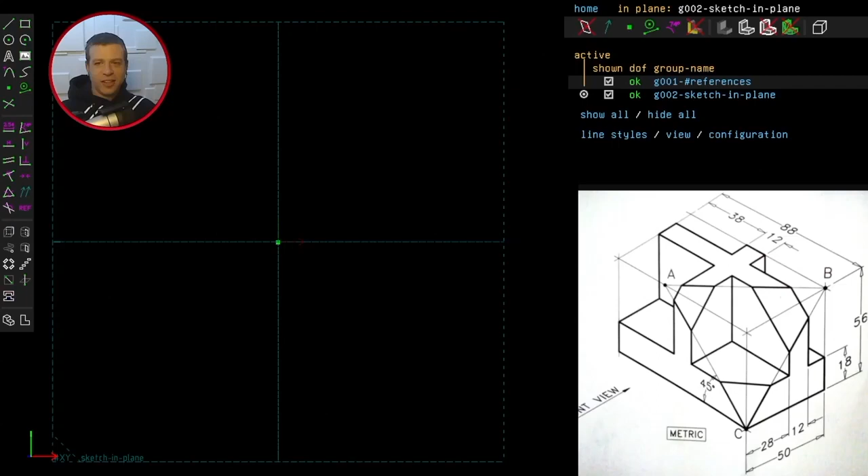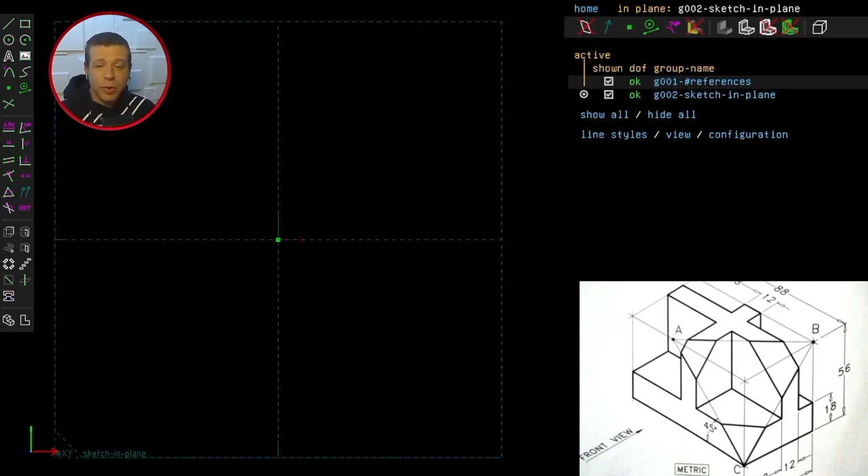Welcome to challenge 3. Let's take a look at the technical drawing. It looks pretty straightforward, but there's one part that looks quite challenging, and that's the slanted cut that goes through the side that faces us. We'll use some things we learned in the previous 2 challenges to help create that slanted cut. So let's head into SolveSpace.

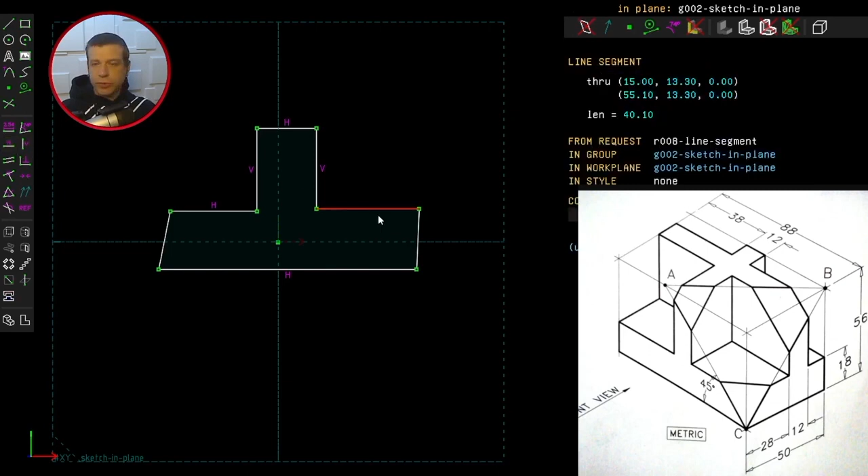It doesn't have to be perfect because we're going to constrain these in a moment. I'm going to make these lines horizontal and vertical now, so this one has to be horizontal. As a reminder, this line looks horizontal, but it isn't. You need to click on horizontal or vertical until you get the letter next to the line, and that is now definitely horizontal.

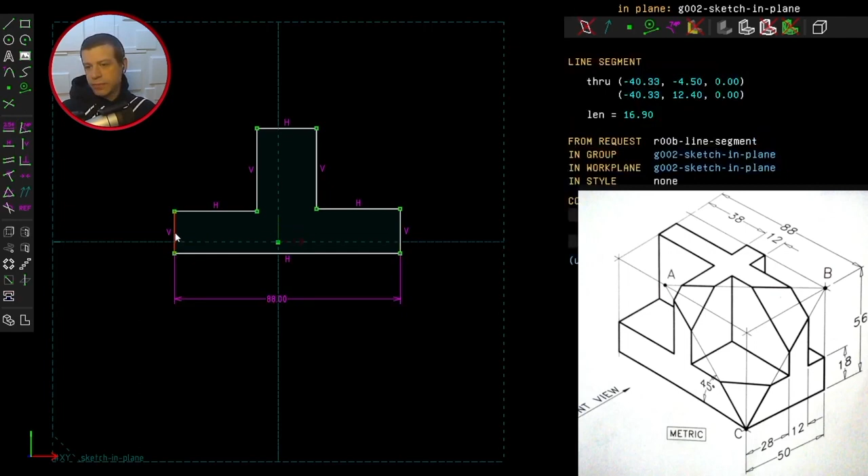Now we've got 8 degrees of freedom, and that's because we need to tell SolveSpace the length of these lines. This line is 88 millimeters, and this line is 18 millimeters.

You can see that we've got 6 degrees of freedom, so these lines need to be sorted out now. Well, we know that these have to be equal in length, so we select the lines and then select the Constrain Equal Length button. Now they're exactly the same length.

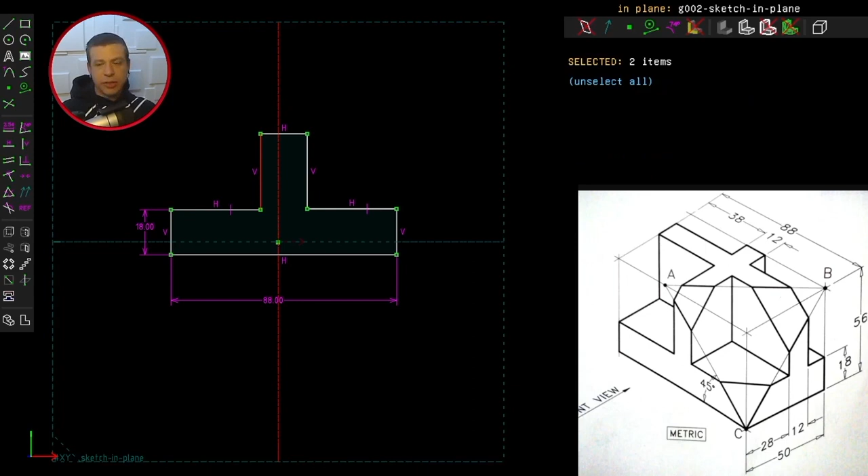This line here is 38 millimeters - you subtract 18 from 56 to get that. And you can see these 2 points are not horizontal, so I need to say that these 2 lines need to be the same length, and that is 12.

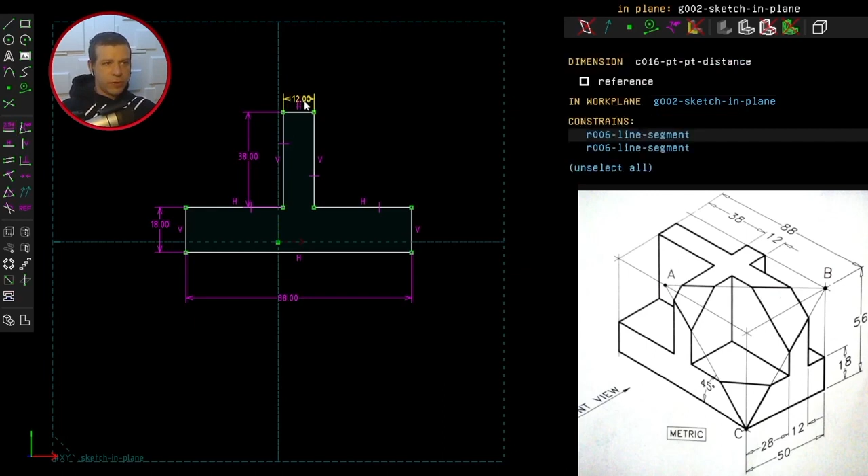The only thing left is 2 degrees of freedom because I can move the whole thing around. I need to anchor it. I'm going to select this point and that point and click Constrain Point on Point. And now we can extrude it.

By 50 millimeters. Okay, so the next thing I need to work on is this rectangular shape that's been extruded at the top here. So I need to create a new work plane.

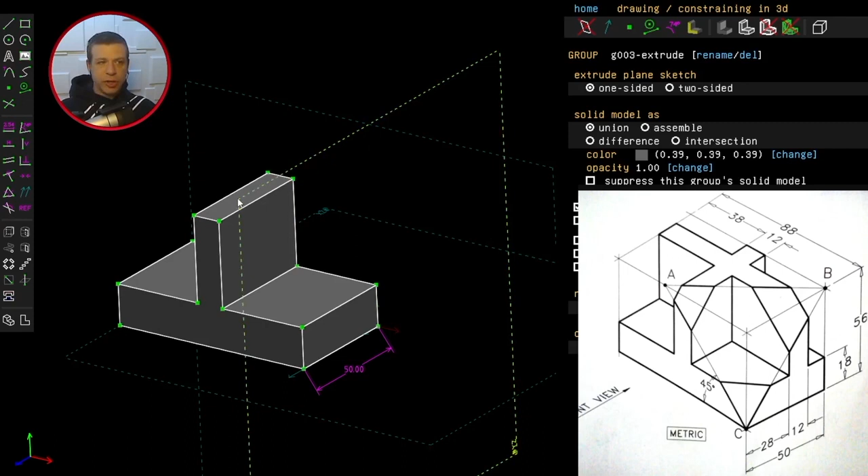Select this button here, and now we're going to be working at the top of this part of the object. So whatever we put here now will be flush with this surface. I need a rectangle.

Let's constrain that. So this point and that line have to be overlaid over each other. I'm going to constrain the point onto the line, and same thing on this side.

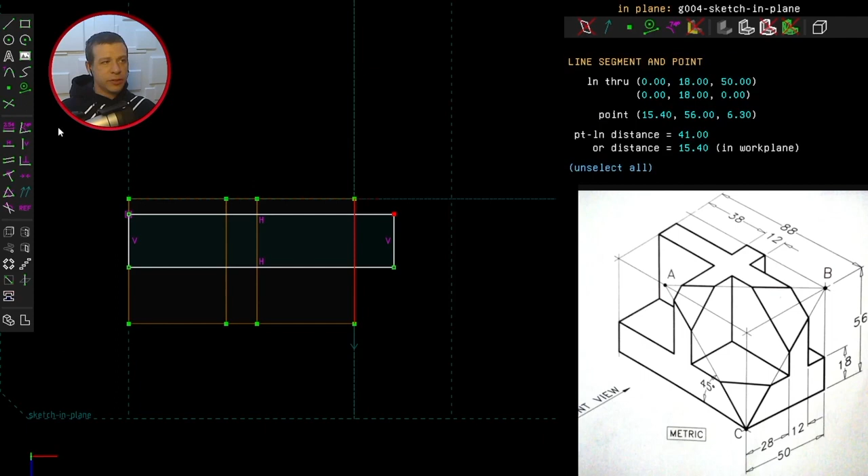Now that's constrained the length of the rectangle. Let's specify the width, and that needs to be 12 again. We've got 1 degree of freedom left, and that's because I can slide this.

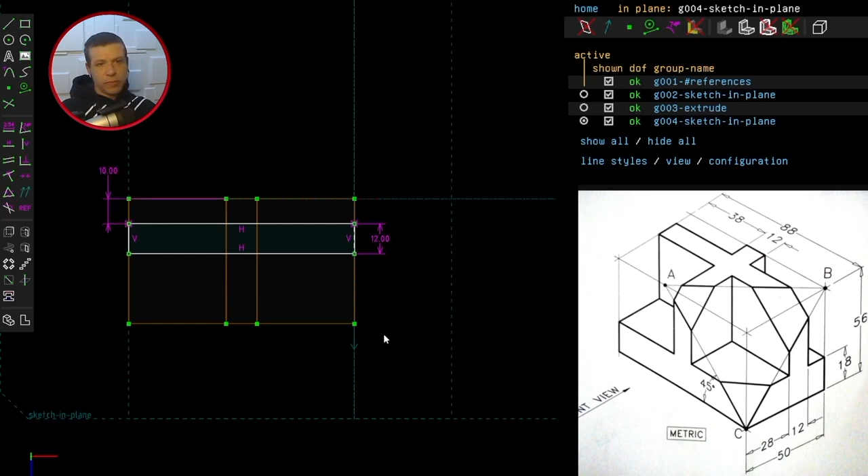So I need to specify the distance from this point to this line: 10 millimeters. Now we've got 0 degrees of freedom, so we can extrude this.

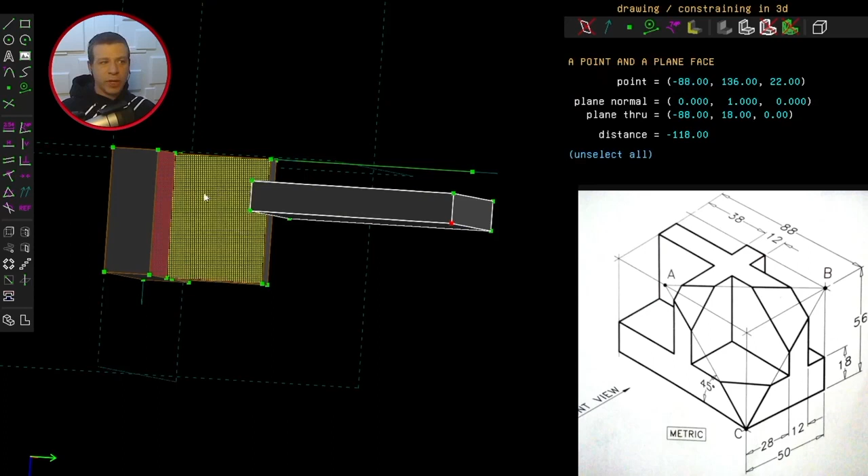You can see it goes outside, but I want to say it's a union - I don't want to take the difference. It is a union this time, but I want this point to be flush with this surface. So I've selected that point and the surface, and now we need to click this constrain point onto surface. Now we've got a unified structure.

So far that looks good. If we look at the diagram closely, we see that we already have point C given to us, but we need to place A and B in the model. A and B are in the same plane at the top of the model.

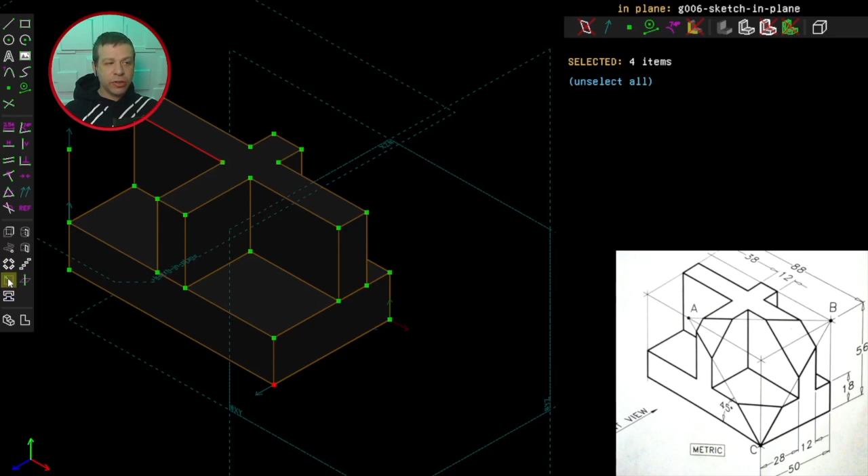I'm selecting these 2 lines and the point and clicking on New Group in New Work Plane. I'm going to put B in first, and B is directly above this point down here. If I rotate that, you can see now we've got B here. Clicking this button takes us back to our work plane.

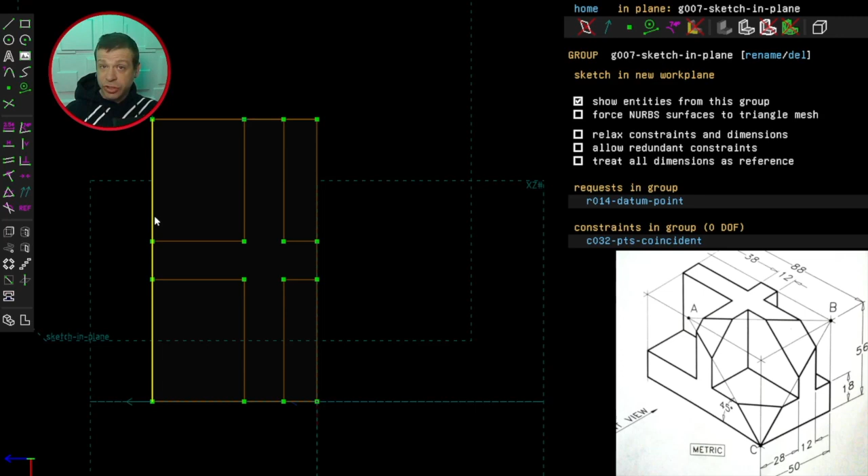Placing A is a little bit more challenging, and that's because it's somewhere along the line here, and we need to calculate the position of that point using the angle that we have in our technical drawing.

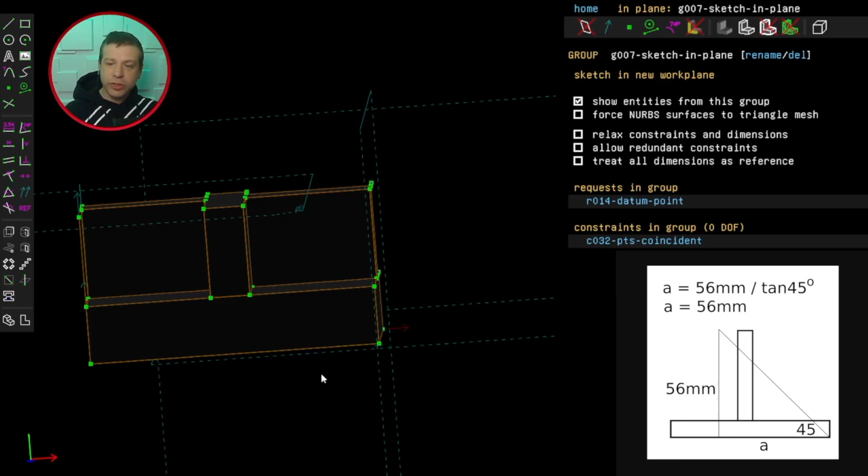Since we know the angle and we know the height of the point, we can work out what distance A is. So we can go back to our work plane, and now we know where to place A. Get a point, I'll place A somewhere on this line. Now what to do is click on these 2 points and specify the distance between them, which is 56 millimeters. And there we have it - we have A, B, and C was already given to us.

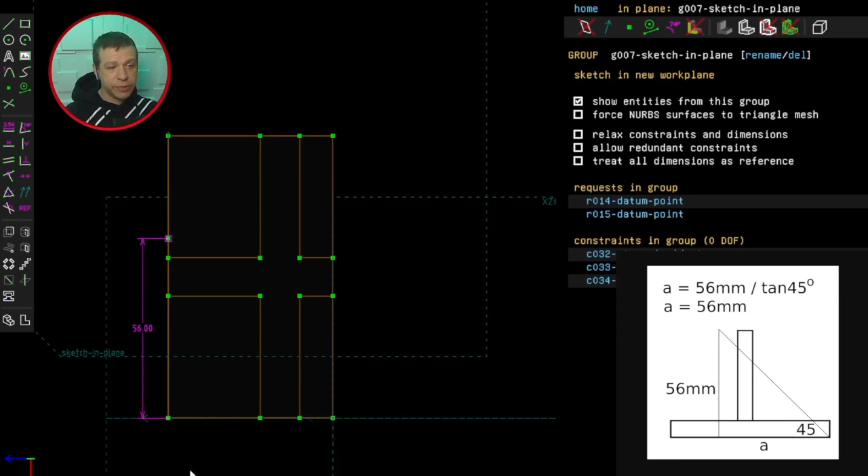I need to create a triangle that I can extrude to create the cut. But before I can do that, I need to create a work plane for that triangle.

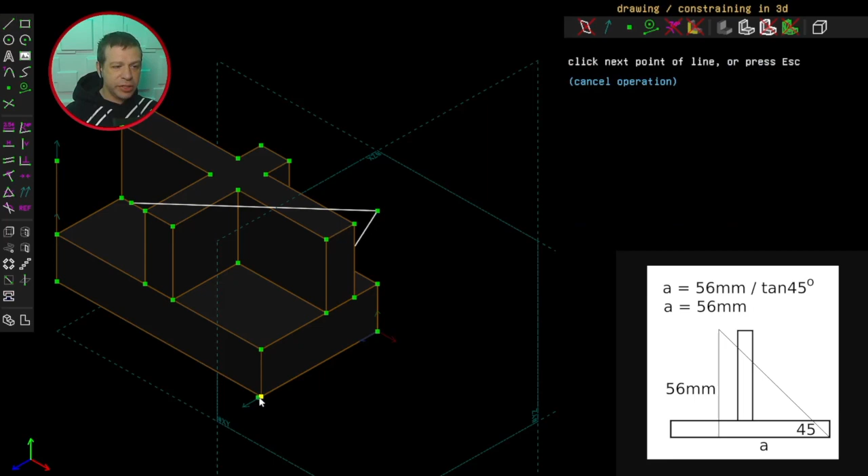I'm going to click on the line sketch tool, click on A, but you see that it won't go to B. The way to fix that is to click on this button down here - that allows you to draw in 3D. So I'll click on A again, drag it to B, from B to C, and then from C back up to A. That's now a contour, but we can't extrude it.

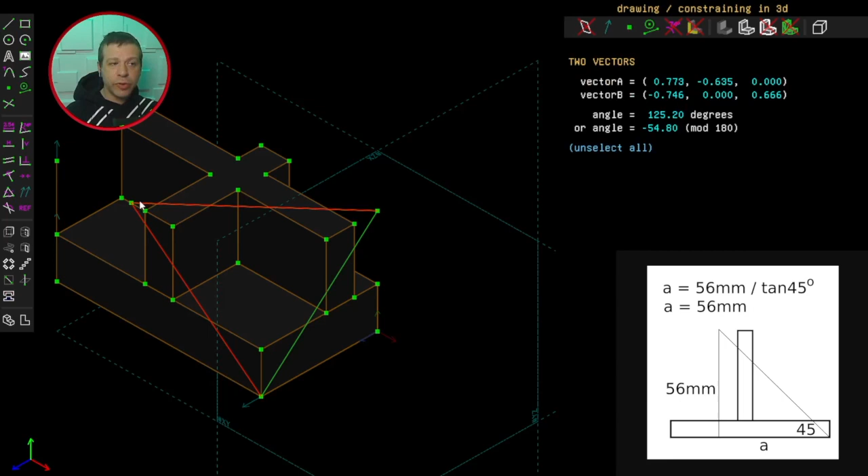If I try to extrude that, I'll get an error message saying I need to have an active work plane first. Now there is a way of doing that. I can click on these lines, hit the W button, and when I select 2 of those lines and click here, that's now my new work plane.

I now can create a triangle in this new work plane. It's just one of the ways that SolveSpace does things.

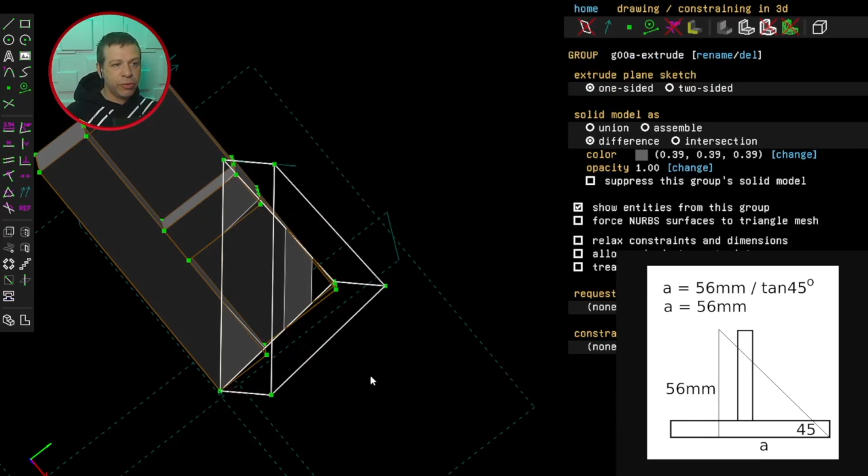Now I can extrude that model, take the difference, and drag that difference cut through the model this way. We've got 1 degree of freedom left because I need to specify the depth of that cut. So I'll select the axis and say it's 20 - that's just a number off the top of my head.

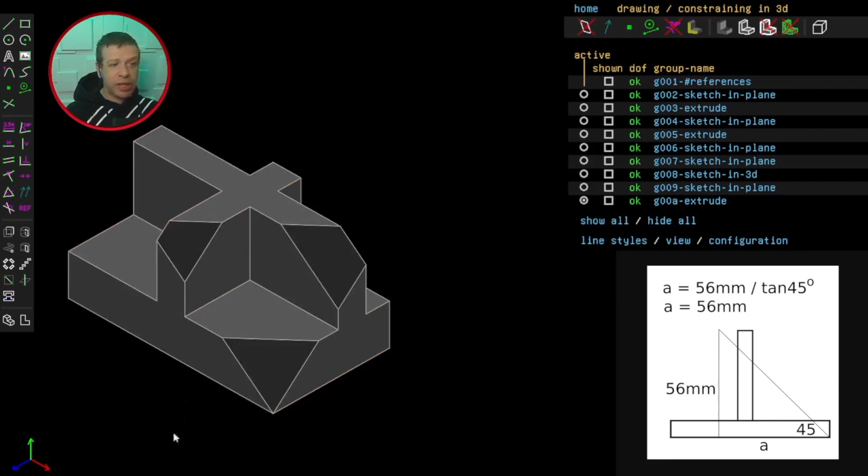Go to the isometric view, back in the properties panel, hide everything, and then we have it. That was fun. Let's head into challenge 4.